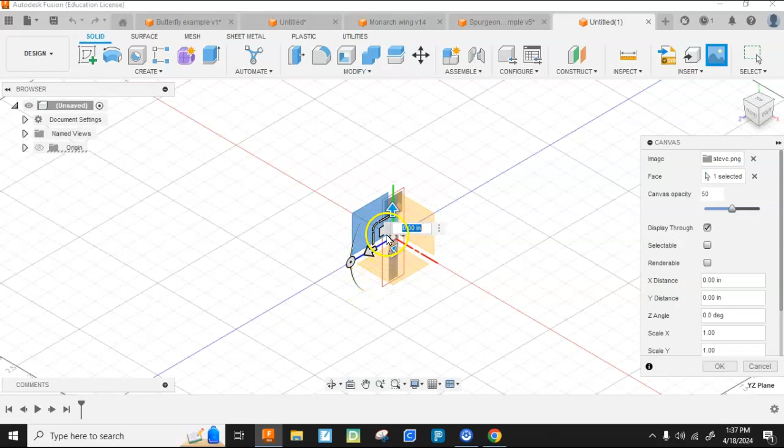Alright, I'm going to rotate him into the prone position. And then I'm going to scale him up a bit.

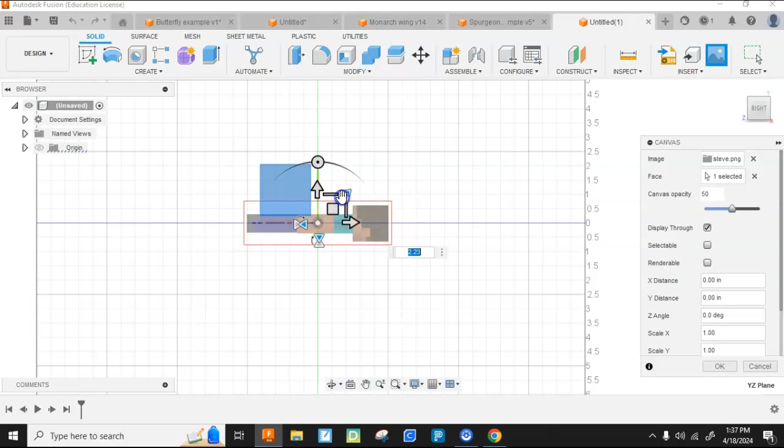I'm going to get exact scaling, so let's see, I want to make Steve about 5 inches long. That'd be about 5 inches if the block goes from 0 to 0.25, or 2.5, so that's 2 blocks, so that's about 5 inches, so I'm okay with that.

Now I'm going to go ahead in there and draw them. I'm going to just draw them with squares. Oops, I'm going to choose that. I'm going to draw them with rectangles because he is rectangular.

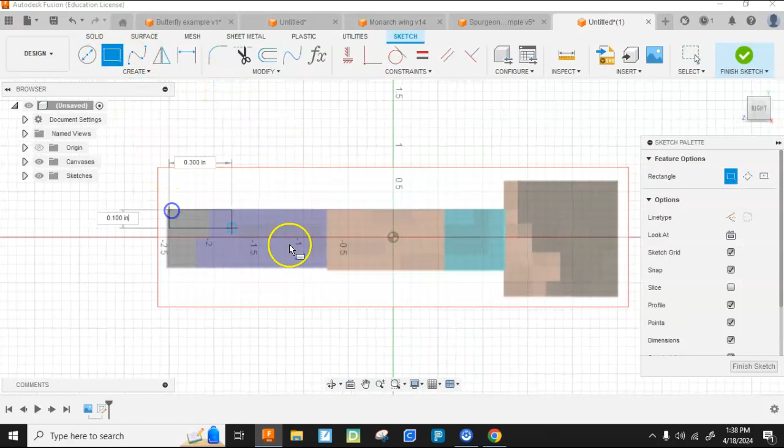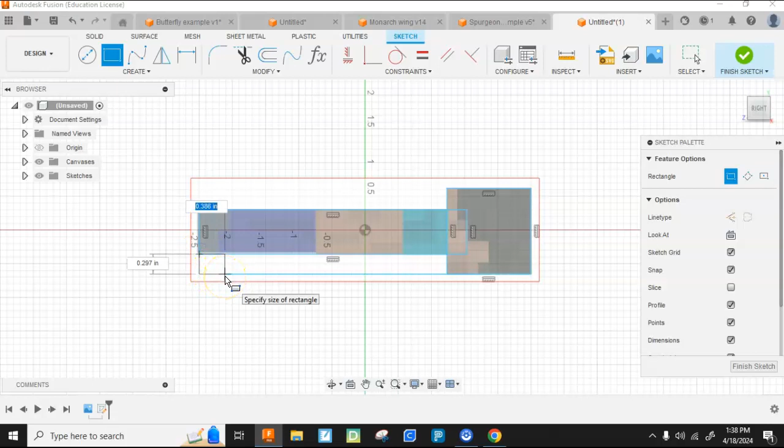Draw one there for his body. I'm going to draw another one here for his head, being sure they overlap. That's good. And then I'm going to put his feet on there. I'll add his arms here in a second. Alright, looks good to me.

Alright, I'm going to finish the sketch. I'm going to go to extrude.

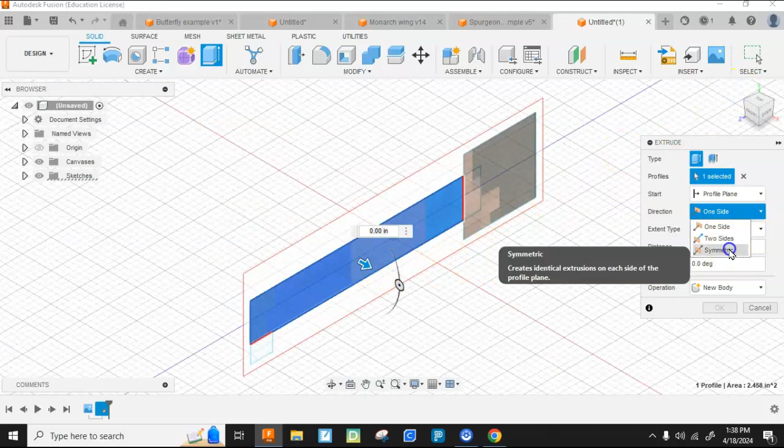I'm going to extrude his body first. I'm going to make that, please note that I'm going to extrude symmetrically. That way I can use symmetry as I go. So I'm going to bring his body out.

I'll work in 0.5 inch increments. So that's an inch wide.

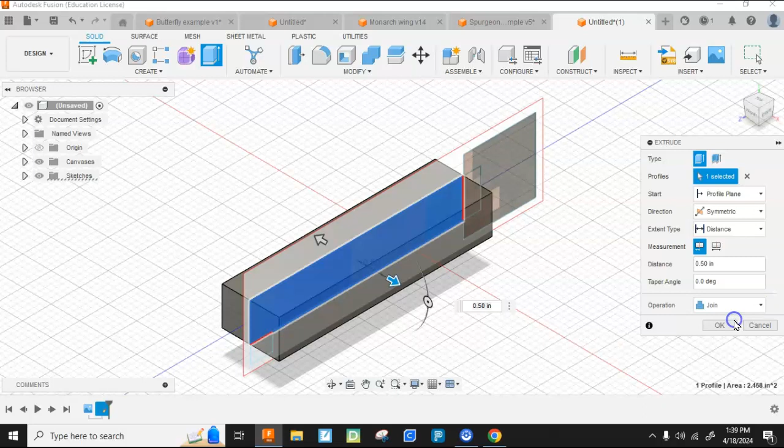Okay, and that will come in as a new body. Or I'm going to go join. Join everything, so I just have one body.

I'm going to extrude. Now, it won't let me select this when I go to extrude that, so I have to come back up to sketches, and I have to hit the drop down, and I have to turn on the eyeball there. So now it will let me do that.

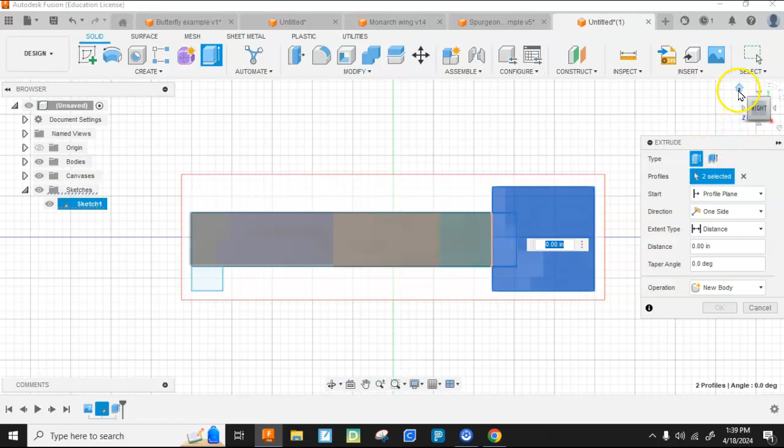So now I'm going to extrude the head, and again, that's going to be symmetrical. I'm just doing that by eye. Steve's head is a little bit thinner.

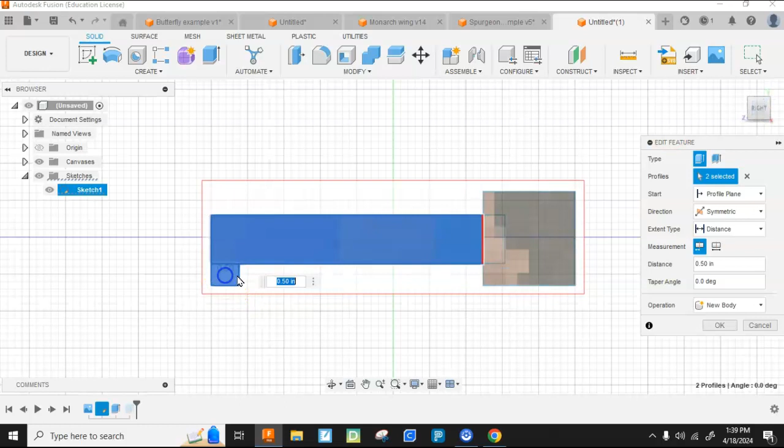That's good. I'm going to go back to that original extrusion and touch that block also, so the feet are also extruded. So now I got that.

So now I'm going to add some arms. So I'm going to add this on here. I'm going to snap to that corner.

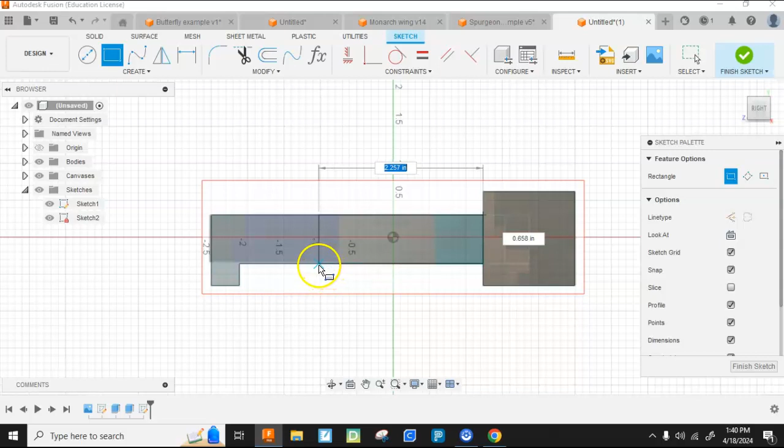I'm going to bring his arms a little bit longer, because making them longer lets me get a little better motion here. I'm going to go ahead and hit finish that sketch, and then I'm going...

to extrude that. I want to make sure, I'm just going to bring that out. Let's see, 0.5 inches, and I'm going to make sure that says join there.

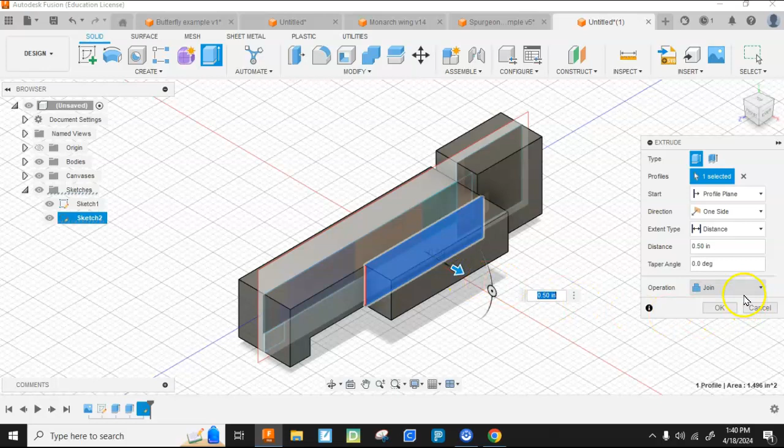That's okay. I'm then going to use mirror to create the other arm, so that'll be a feature. Grab that and select my mirror plane as...

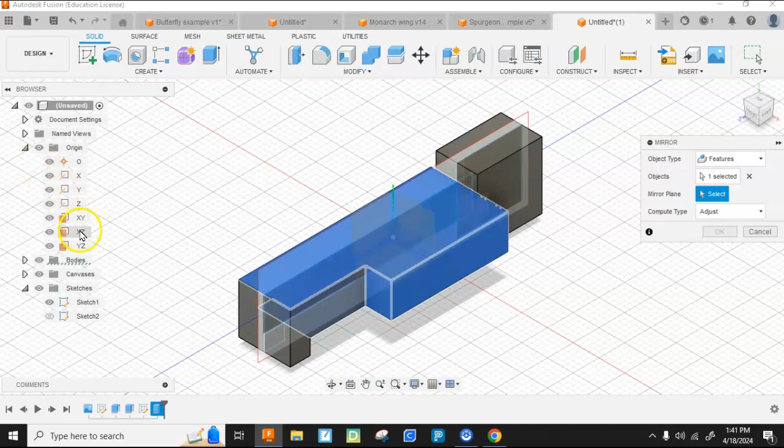It's not letting me do that, so I come up to the origin, turn that on, and see if I can't. It's having trouble grabbing, so I'll just use the drop down and get the plane I want. That one, I want that one.

Okay, alright, so double checking to make sure I still only have one body. That's good. So there's my guy.

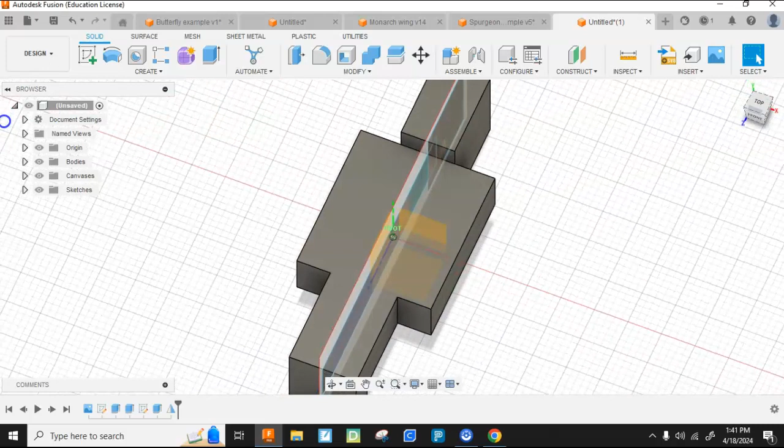Satisfied with that. I'm now going to split my guy up. So this is all right now one body, I'm going to go ahead and do some splitting. So I'm going to modify split body.

That's my target body, the body to be split. I can use lines to split, I can use planes to split. I'm going to do both.

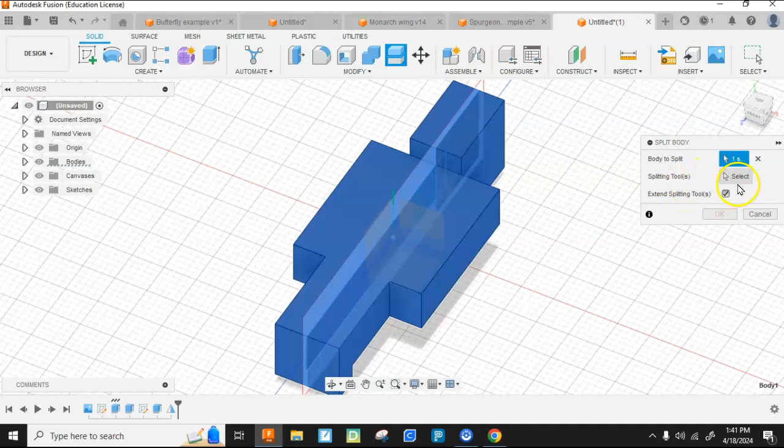So for my splitting tool, I'm going to use that plane. You can see it's going to cut off the arm. So that's now a separate body. I'm going to come over here and do the same thing over here.

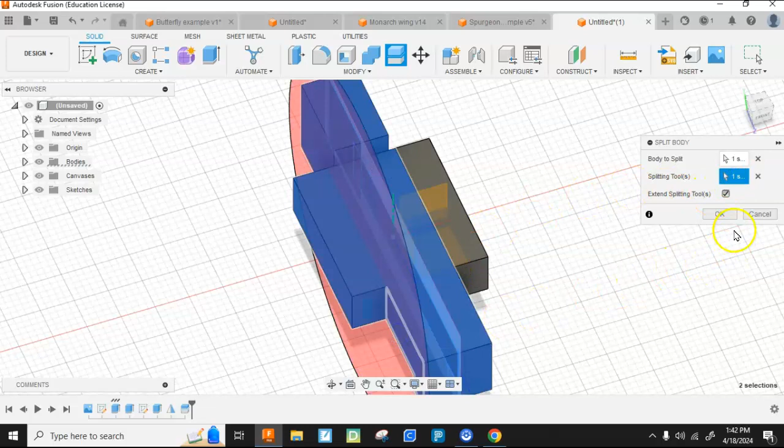Modify split body. And this is the body to split. And I'm going to split the arms at the elbow also.

So for that, I'm going to add a line, draw a line on this body. And that line is going to look like this. So what I'm doing is I'm modeling a bridle joint.

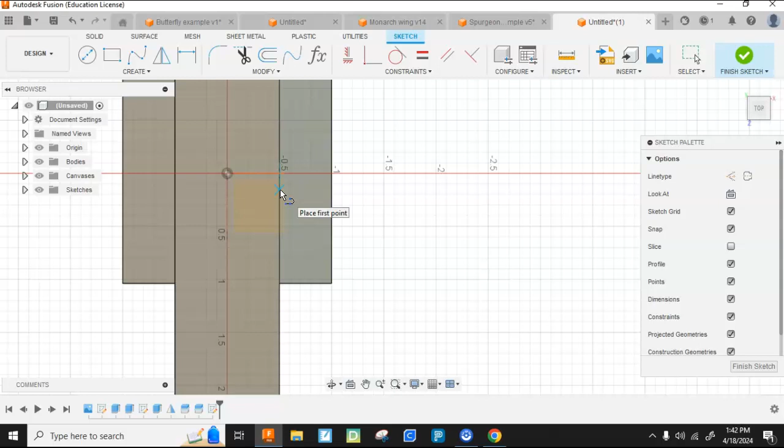So I'm going to come down, see what I'm doing. I'm going to come from about the midline here. I'm going to come down 0.2 inches, go over a third of the way.

That was 0.5 inches across. So I'm going to come over and let's see, 0.5.

Well, I might just have to dimension it. I'm going to go up, over, down, and out. Now I'm going to dimension this.

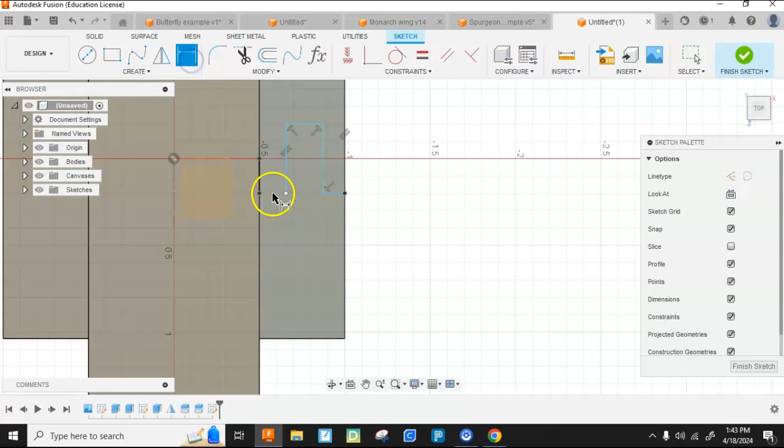Oops, I'm going to add a line there. I thought I did, apparently I didn't. Alright, so I'm going to dimension that as...

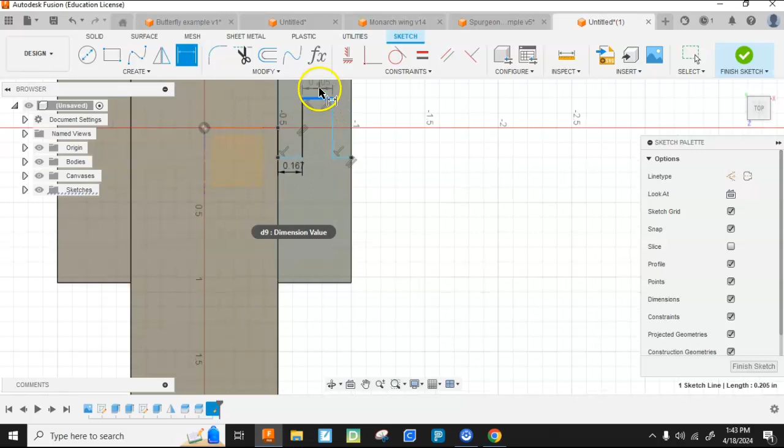0.5 over 3, that's a third of the way. I'm going to dimension this. That'll also be 0.167. Enter, and then that automatically would be correct.

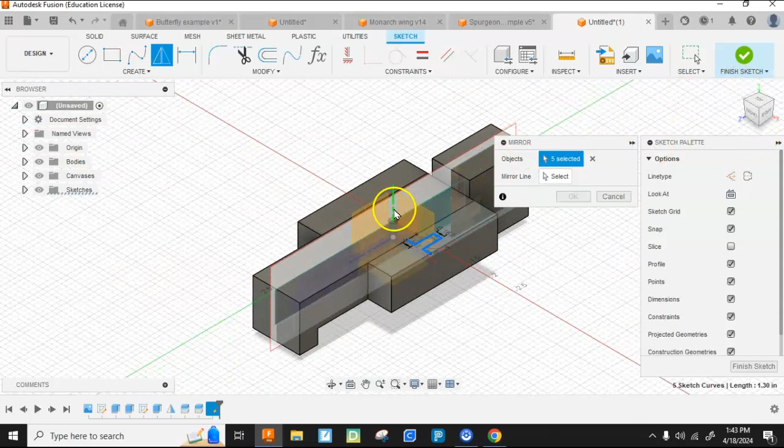So I'm going to go ahead and mirror that. This one, this one, this one, this one, and this one. I'll mirror that about... select, there it is. Okay.

Alright, so now I'm going to go back to modify split body. I'm going to split this body. My splitting tool is going to be my little sketch.

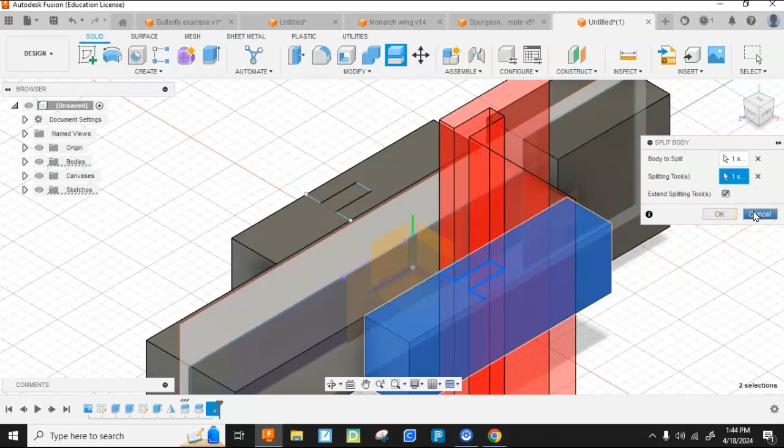And that is good. Okay. And then I'm going to make that sketch visible. And modify split body—I'm going to split that body with this splitting tool. Okay, alright, so I've done what I needed to do.

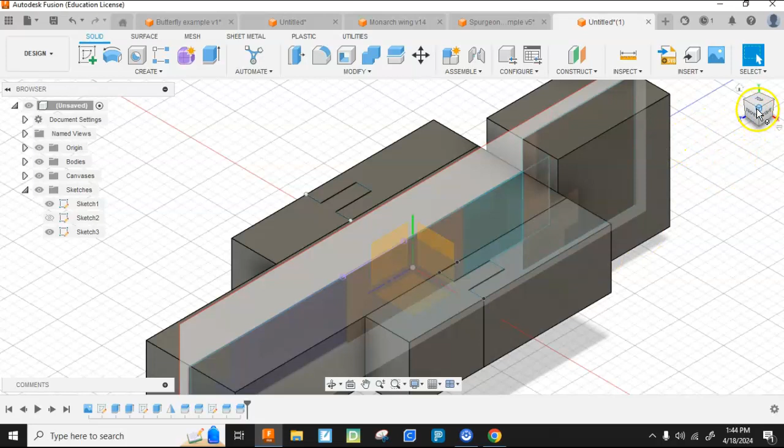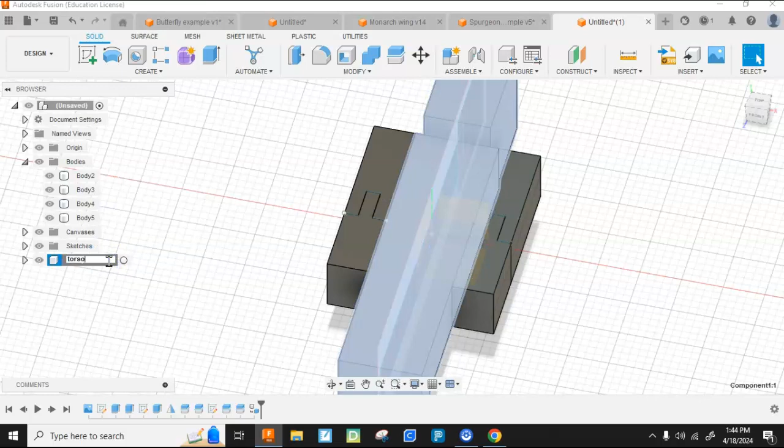Now I'm going to turn all these bodies into components. I'm going to come over here, body 1, I'm going to call that torso. I'm going to create component from the body, and then rename that right now, torso. Enter. I'm going to come here.

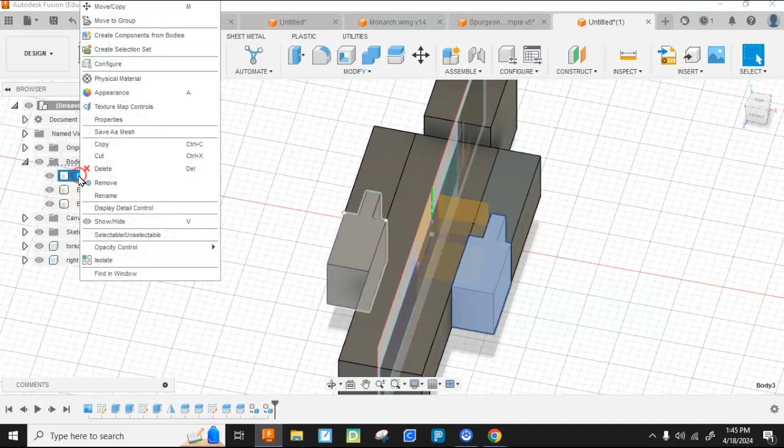And I'm going to create body, and rename that right forearm. And then I'm going to come up to this body and rename that, create component from body. And that will be left forearm.

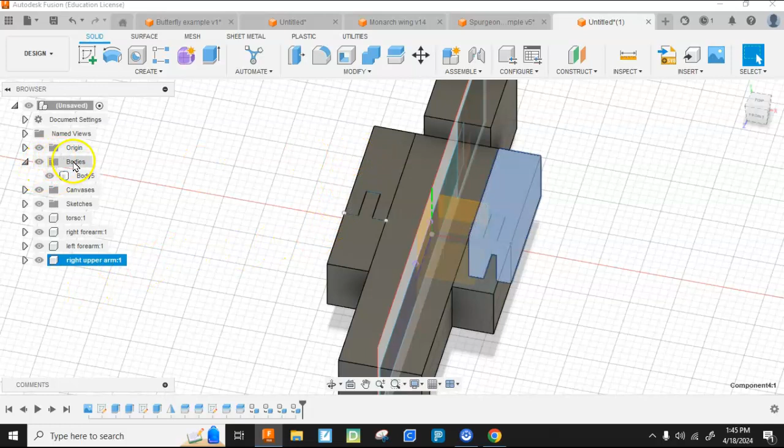And then create component from body, and that will be right upper arm. And lastly, I'm going to create body, and that will be renamed to left upper arm.

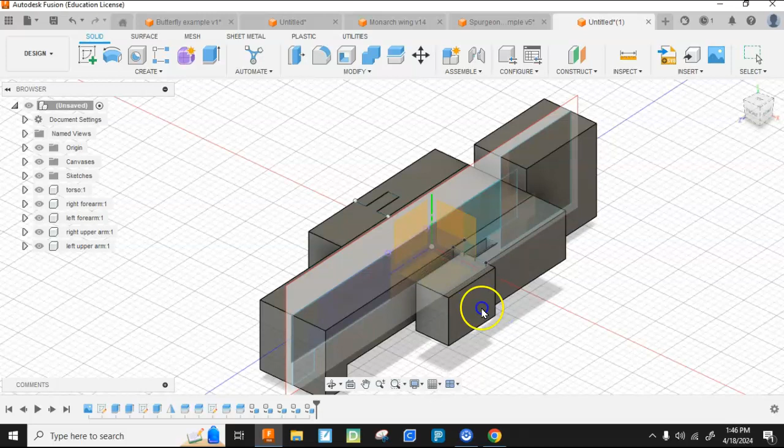Okay, so now these are all components. And what that means is I can start moving them around if I want. That's excellent, that's what I was after.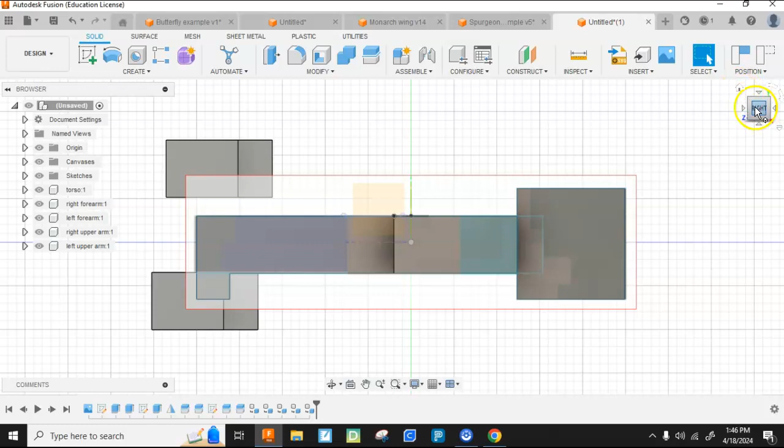So I'm going to move the two forearms out of the way over here, and my first joint I'm going to do is going to be a single pivoting shoulder joint. I'm going to move these a quarter inch—or not a quarter inch, but a 1/16 of an inch out.

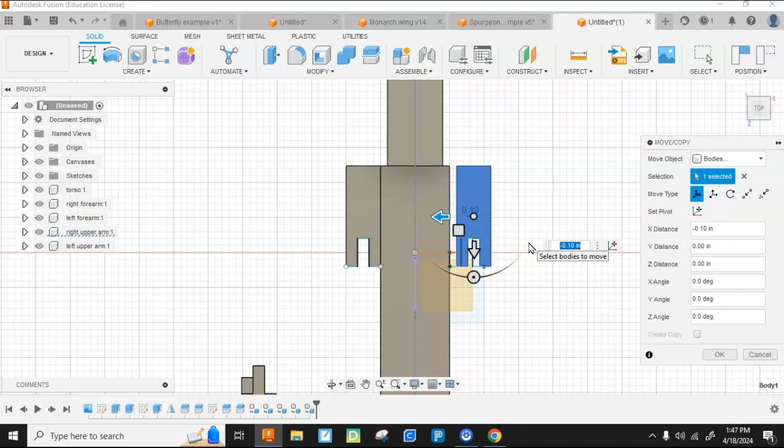So I'm going to come from top view, and I'm going to go modify, move, because I want to control the move. I want to move that this way, and that's going to be 1/16. So, negative 1/16. Boom. I'm going to do the same thing with that one.

I'm going to move that one this way, and that's going to be 1/16. Don't ask me why I left it as positive—I don't know, but that's good.

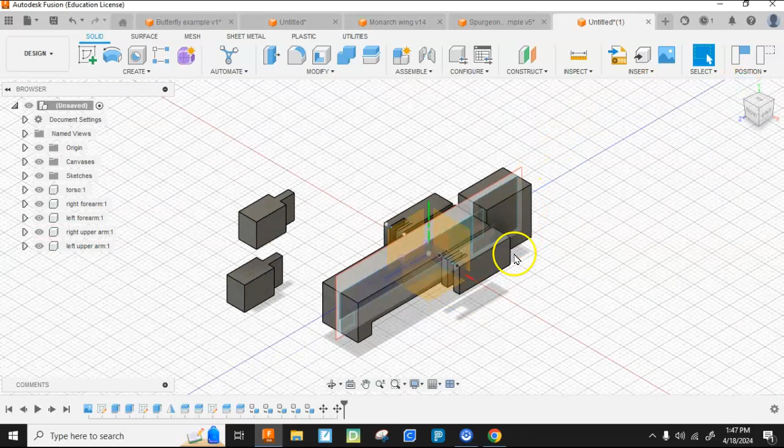I'm now going to, in the overall, which I should probably save sometime, go ahead and hit revert position. Yep, it didn't move—oh, it moved, I see what it did, it moved those originals back. I didn't really need it. Probably should have captured, but it doesn't affect me.

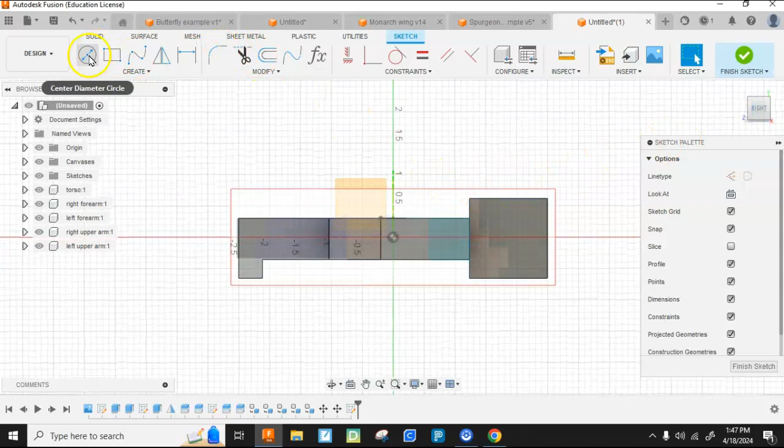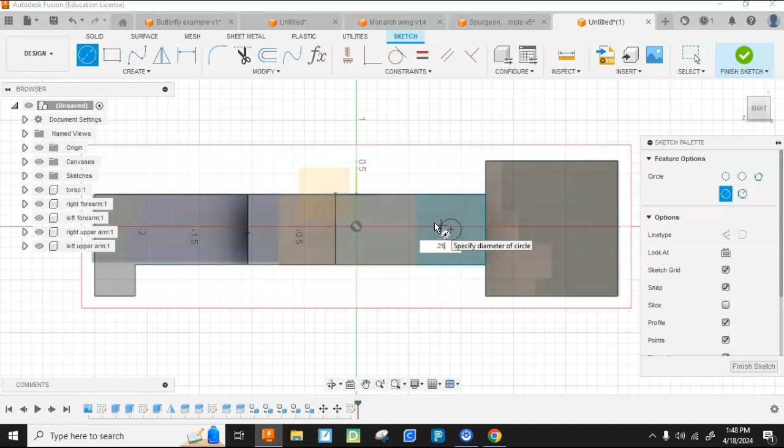Alright, so I'm going to pivot this on the center line. Let's see, I want a little more than that, so I'm going to cancel. You're going to see what I'm doing here. I'm going to put a circle here, that is 0.25, that way I can just literally use a dowel rod if I so choose to. Enter, finish that sketch, and I am going to extrude this all the way through as a cut.

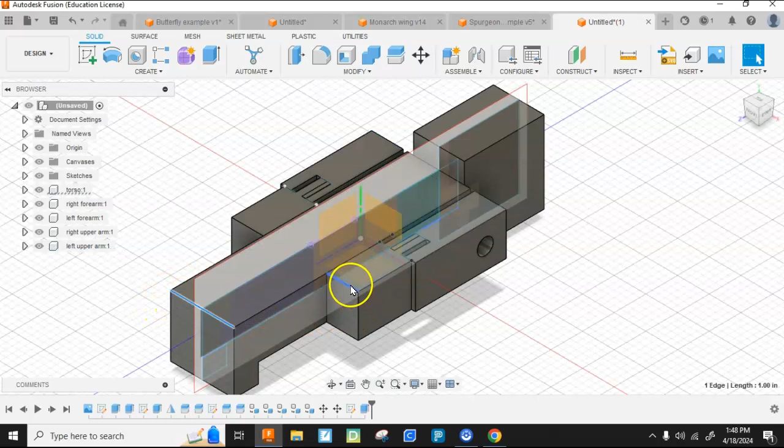Now I'm going to make a rod, a pin to put through there. That is going to be a total distance of 0.5, 1, and 0.5 plus the two 1/16-inch gaps. So it's going to be—I know it is 2 and 2/16, or 2 and 1/8 there.

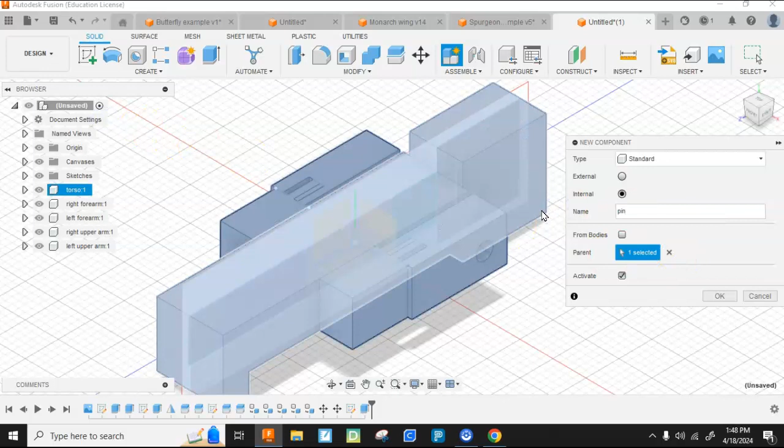So I'm going to create a new component, and this will be pin. My pin is going to be—I'm just going to draw it up here in space. It'll be a 1/4 inch. I'd be a little bit smaller in real life, but we'll end up sanding that down. I'm going to go ahead and extrude that pin, and that will be 2 and 1/8, which is 2.125.

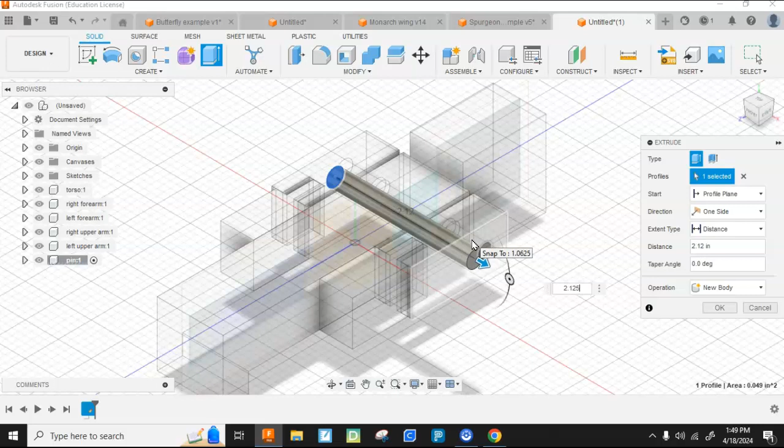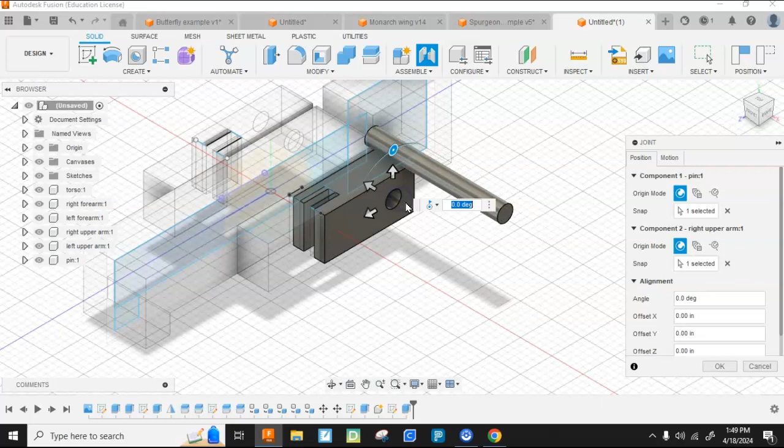Alright, now I'm going to go back up to my total assembly. Move that, and I'm going to place this as an assembly. So I'm going to go to joint. I'm going to join that circle and that circle, and I'm going to make that a rigid joint, so it's going to be rigid to that.

Okay, I'm going to go ahead and make it rigid on the other side because the arms aren't going to move independently—they're going to simply be glued. So now, actually, I'm going to do an as-built joint because it's in the place I want it to be. So I'm just going to click on that and then that, and it's rigid. I'm going to hit OK.

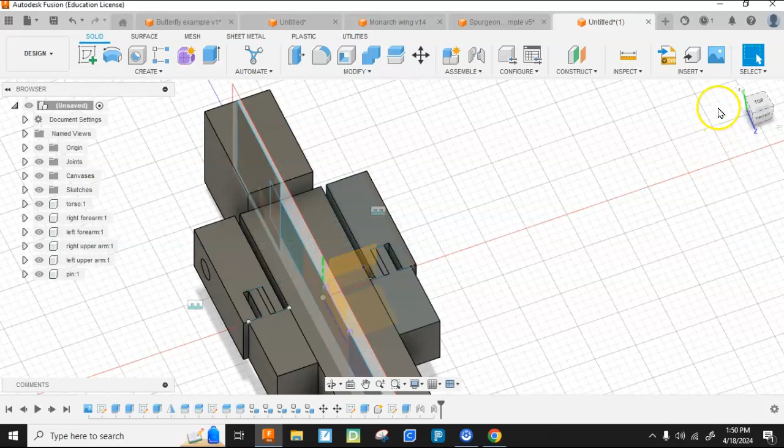So now, if you look, that is—if I pull it, I'll Control-Z it back. So that is a rigid joint. Now I'm going to Control-Z back.

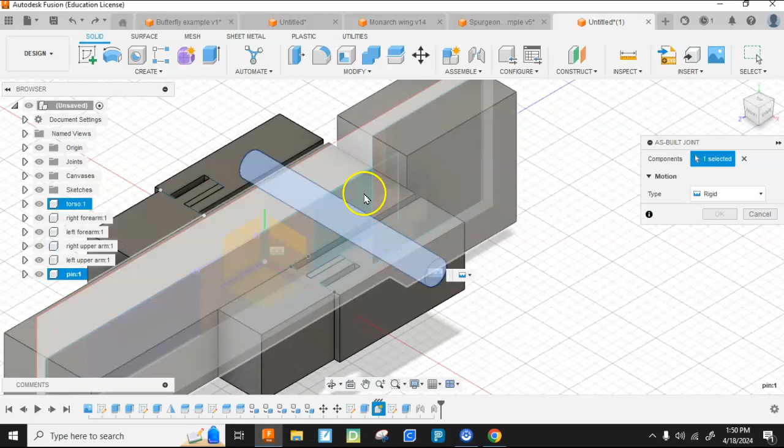Okay, so now I'm going to do an as-built joint again. And I want to do that with—I don't know if it's going to let me see what I want to see. Let's try to go in there. I got to choose that. I'm going to have to do this a little differently anyways.

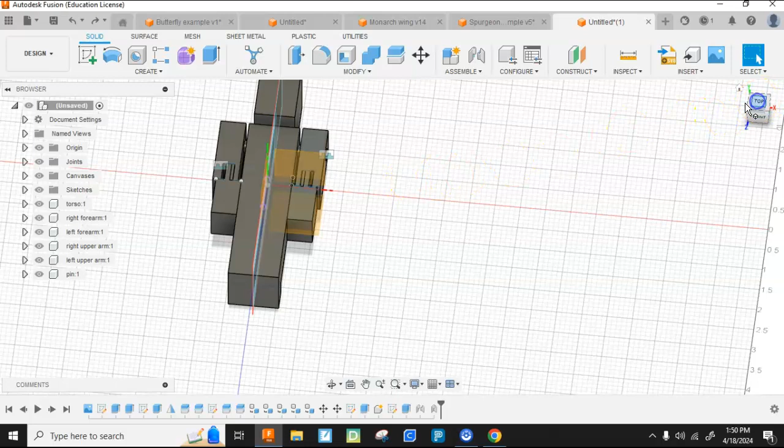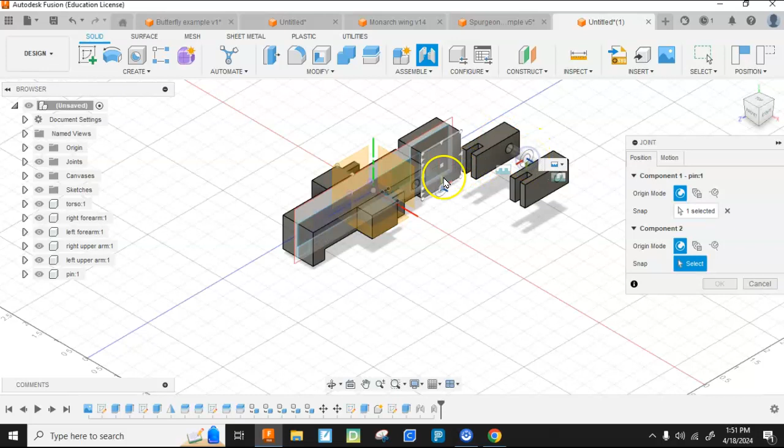So I'm going to come up here, grab that. Oh boy. Bring that up there. I'm going to do assembly joint. Alright, do that midline with that. Alright, now I'm going to center this.

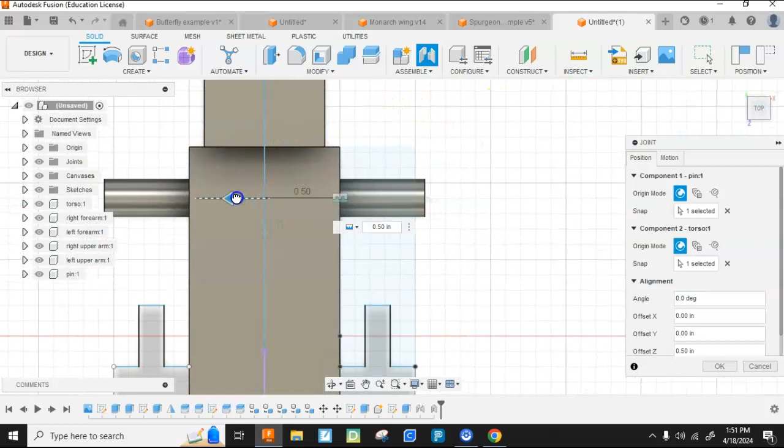I'm concerned that it's not going to be symmetrical, I'm going to have to adjust a little bit. I think that might be at 0.5 inches. Hit OK. Oops, edit that joint.

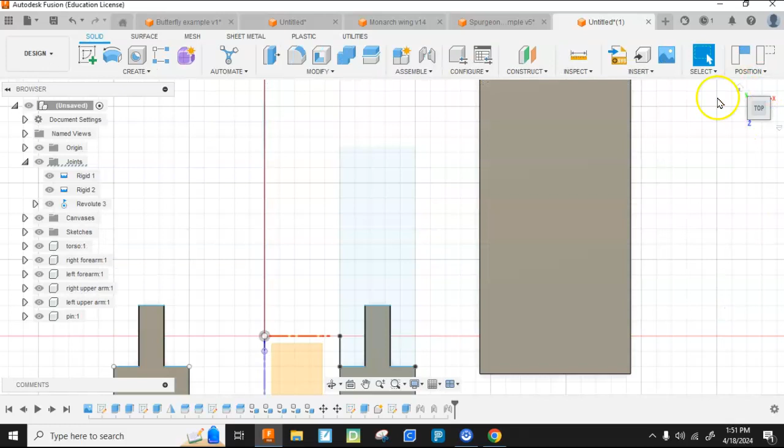I needed that to be revolute. So this will be a joint, and that needs to be a revolute joint. Hit OK. Now let's see how that did. Everything's moving. I'm going to let it go back to there, and now I'm...